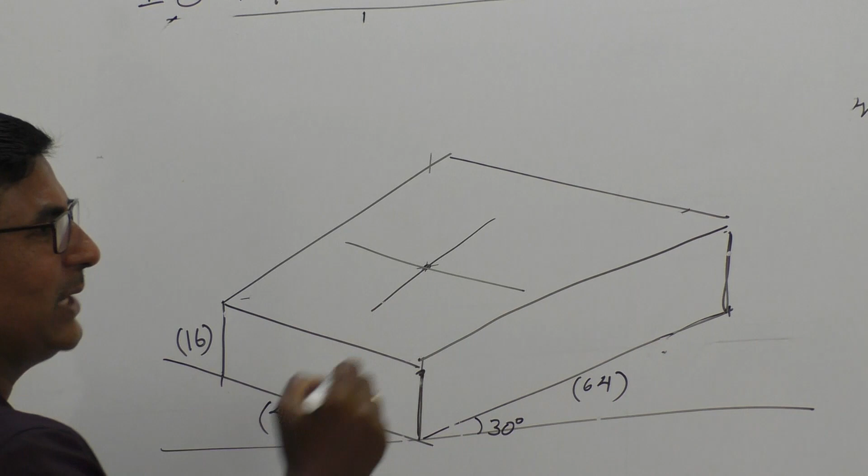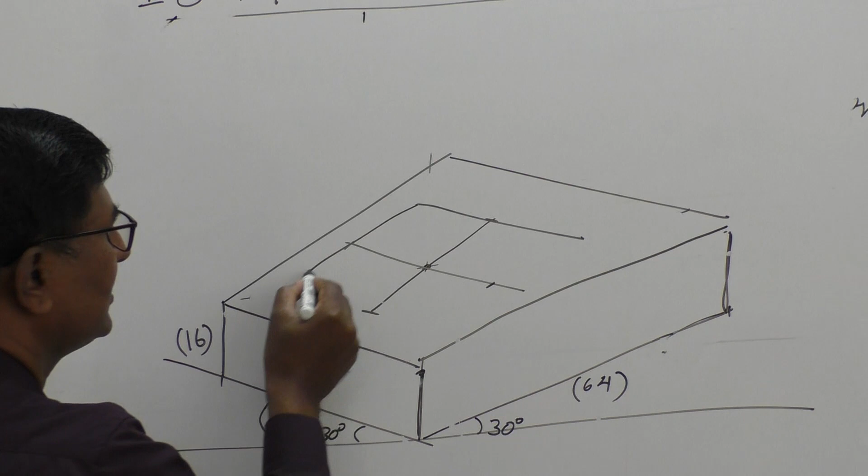Coming to this one, 40 into 40. You take two boxes this side, two boxes this side, two boxes this side, two boxes this side. Draw a line parallel to this, parallel to this, parallel to this, parallel to this. Make sure all these lines must be very thin.

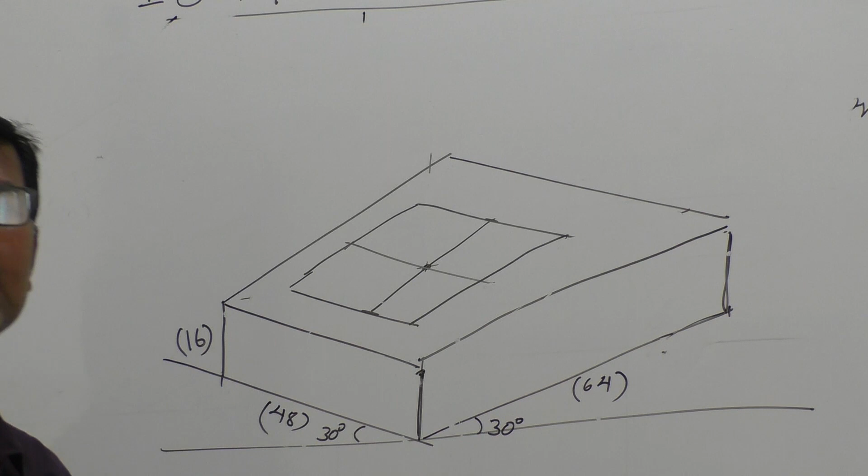Till I finish the whole problem, every line must be thin so that it avoids erasing the things. So in order to make you people look at the things properly, I have drawn a dark line, but in fact they are supposed to be very thin lines. So I finished the bottom square, that is 40 into 40.

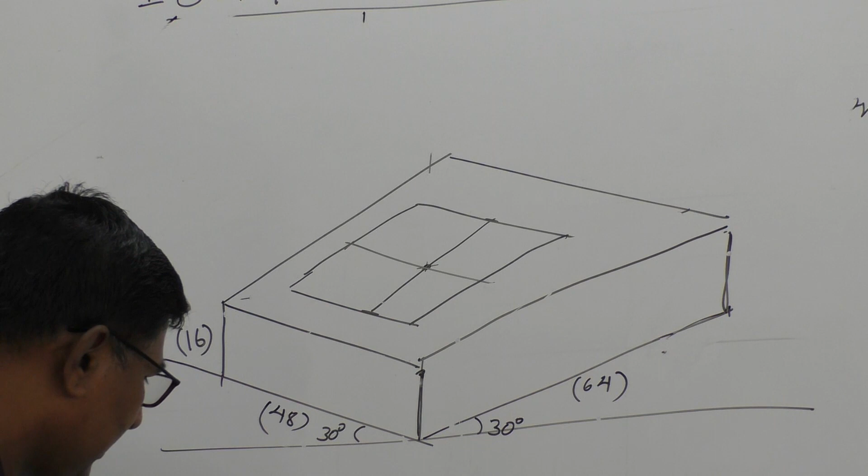Now I am supposed to take 30. So if I take this one, 0.8 into 40 means 32 millimeter. I took 32 millimeter actually. If this is the center, this is 32, 32, 32, 32.

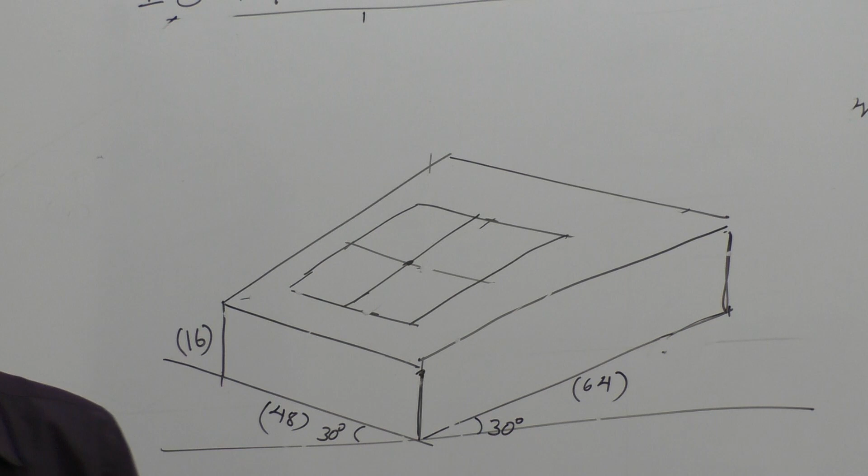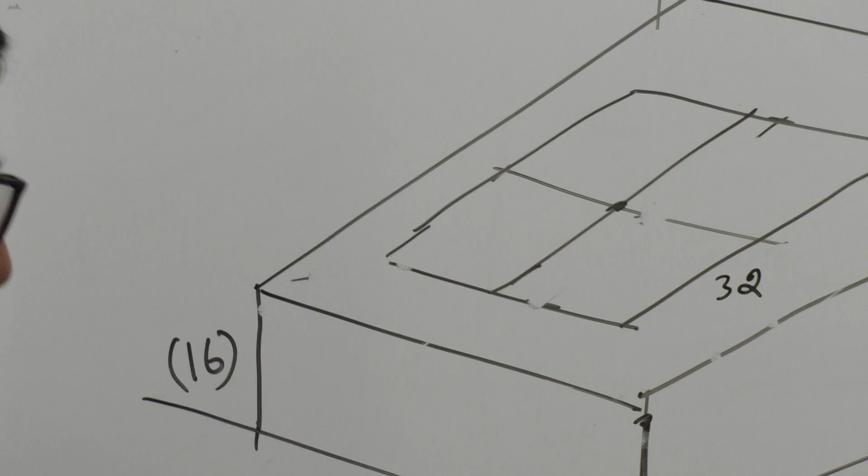What I said in this paper, already these 4 boxes, if you count, they are reduced to a size of 32 millimeter. You need not worry about that, but actually I have taken 32 millimeter here. This 32 I have taken here. 16, 48, 64. 64, 48, 16, and this is 32.

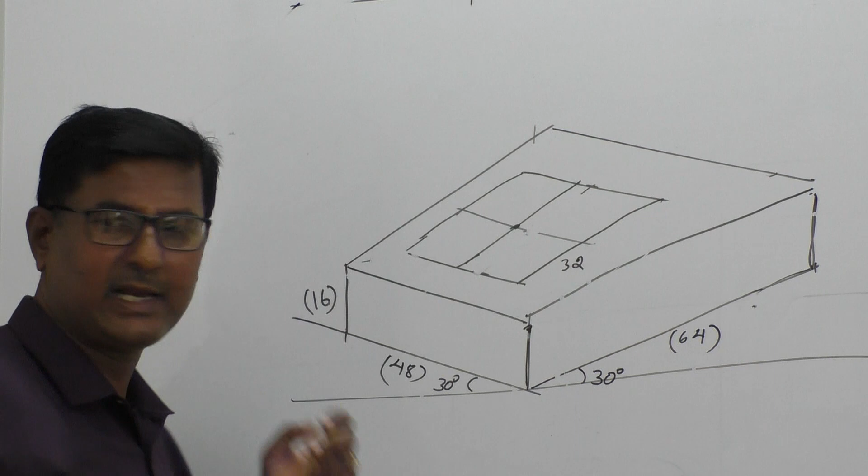Out of which 16, 16, 2 boxes means, whereas there it is already reduced to a size of 32. So what is the height now? 30. Again, 0.8 into 30 means it becomes 24.

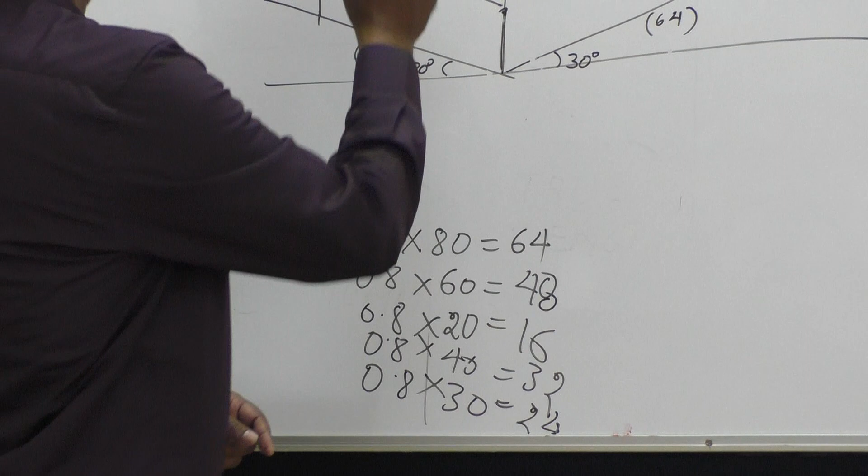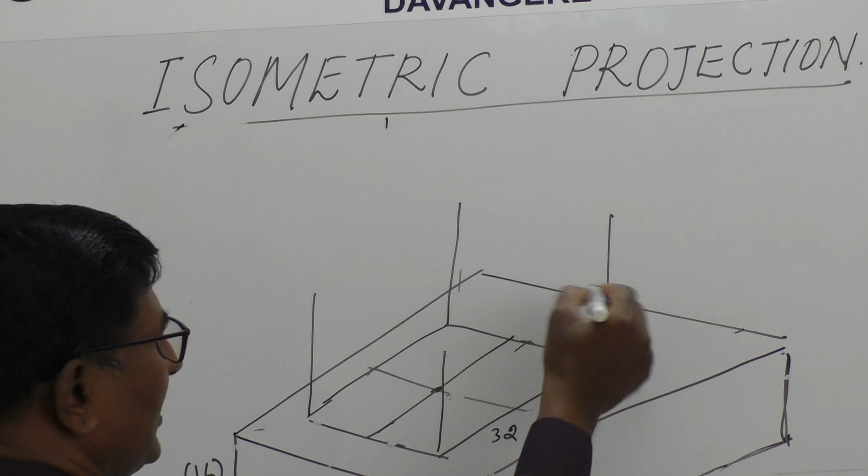Draw a pillar of 24 millimeter, draw a pillar of 24, draw a pillar of 24, draw a pillar of 24 millimeter from every corner of this small square, because this is the second object we are talking about. Whatever I have written in the bracket, you are not supposed to write. Just for the sake of explaining the things, I have written them in a bracket.

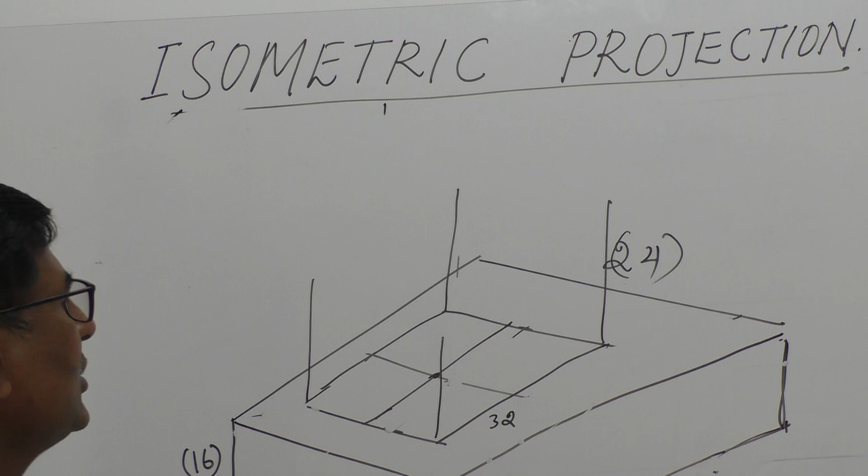Soon after you draw pillars here, if you are comfortable with my teaching, I can speak in Kannada.

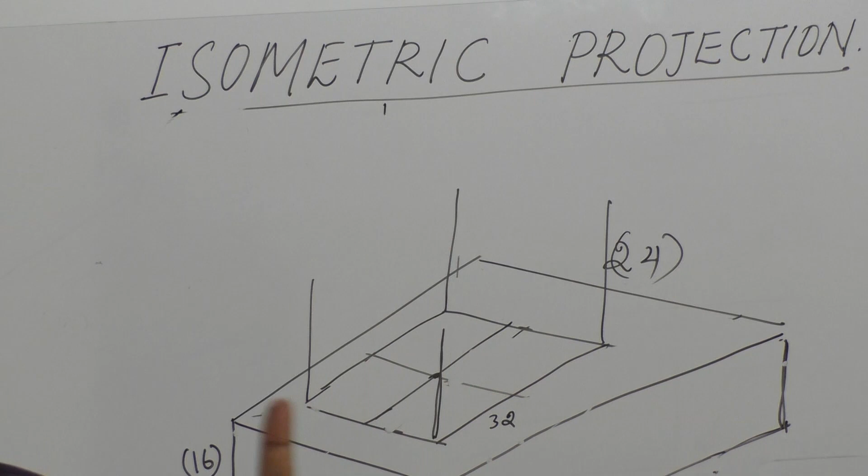It is something like a chapra or a hut that you construct. If you are taking 4 equal sized pillars, you will get a plane which is parallel to the ground.

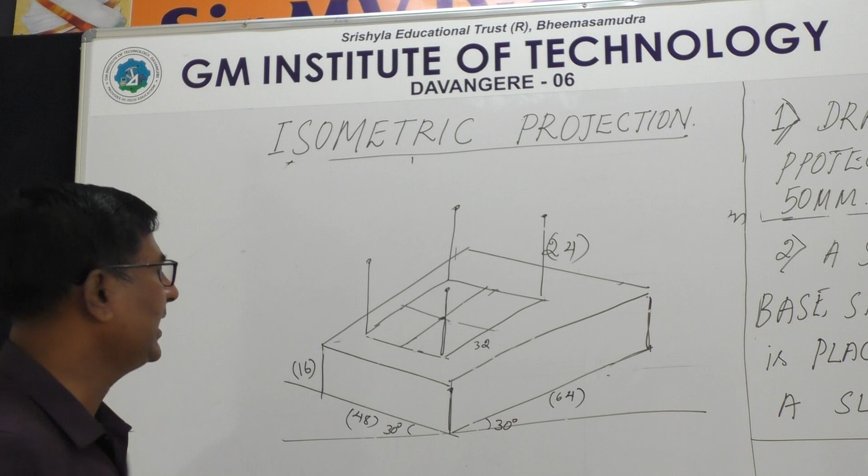Simply connect them together. You don't worry about how it appears. Connect them together, you will get it. So as I said, everything should be thin. Now you make only this portion dark.

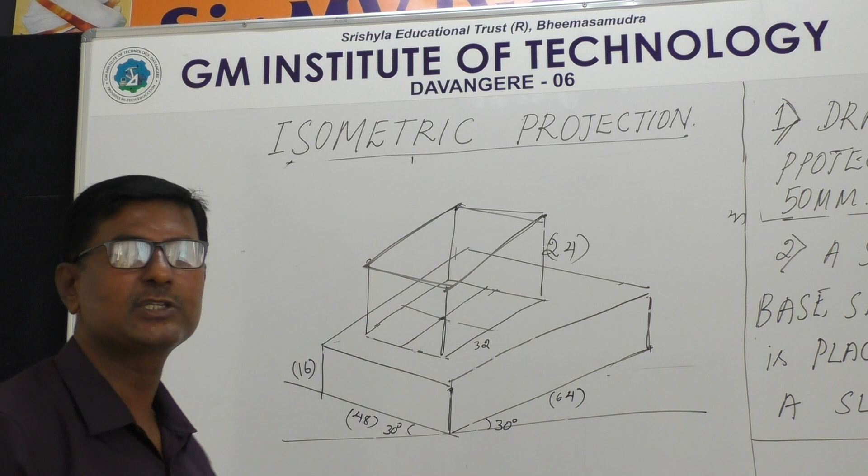Hope you are following, I am repeatedly telling. You are supposed to make it dark. Earlier, all the lines must be thin in the beginning. Later, whatever is visible, you make them dark.

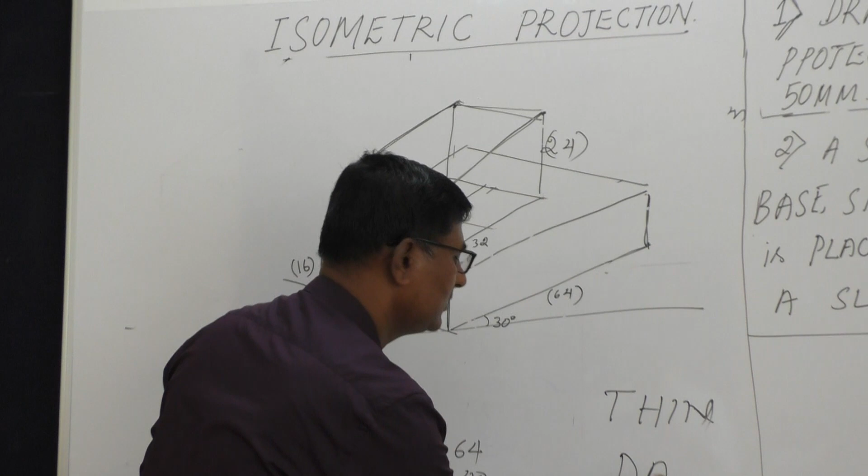Which lines are supposed to be marked? Visible lines must be made dark. What are the visible lines? See, top is visible. Since, as I told, for me there is an advantage that I can erase.

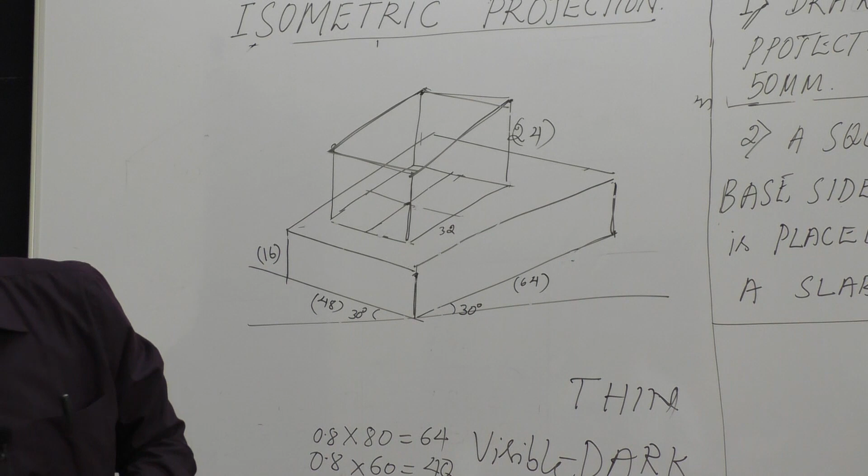I will erase this portion. I will erase this portion. You see how the things become clear. I will erase this portion.

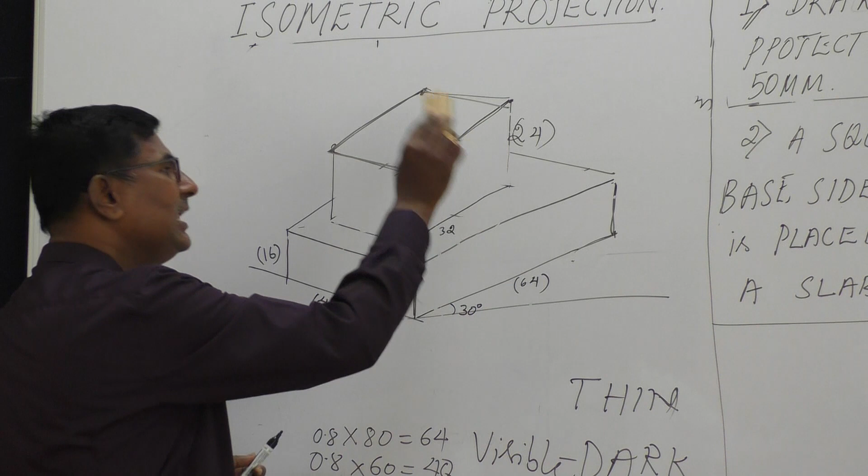Don't erase anything, leave them as it is. But leave the thin lines as it is, whereas you make these lines a little bit more darker than the earlier one.

What is the height of the pillar? It is 24. I have written 32. This is also 32. So make it dark. Make it dark. See, make only this portion of the line dark, this whole length dark, only this portion dark.

In fact, there exists a line here, but you can't see that.

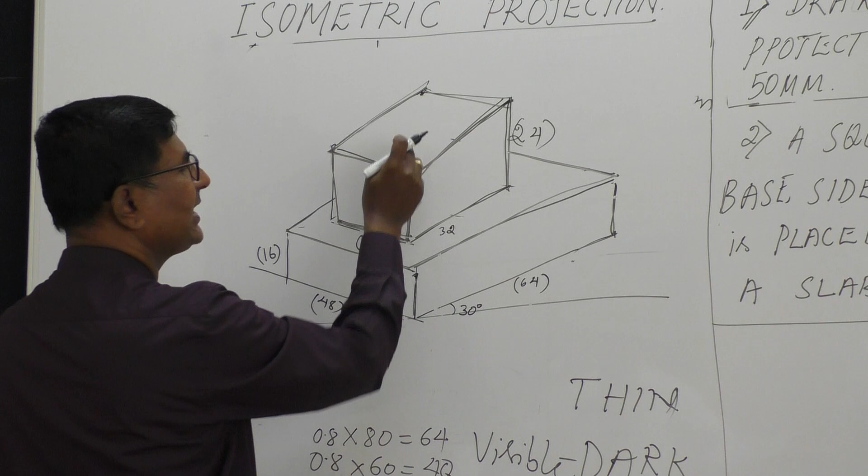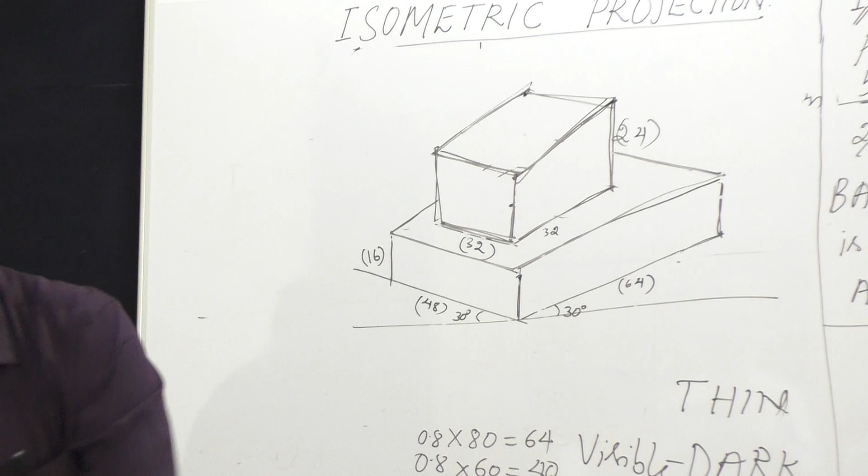This portion of the box will not be visible for you. Similarly, when I am seeing this box, the rear portion of the bottom box is not visible. So whatever is visible, make it dark. Without any hesitation, you make them dark. So this is what isometric projection.

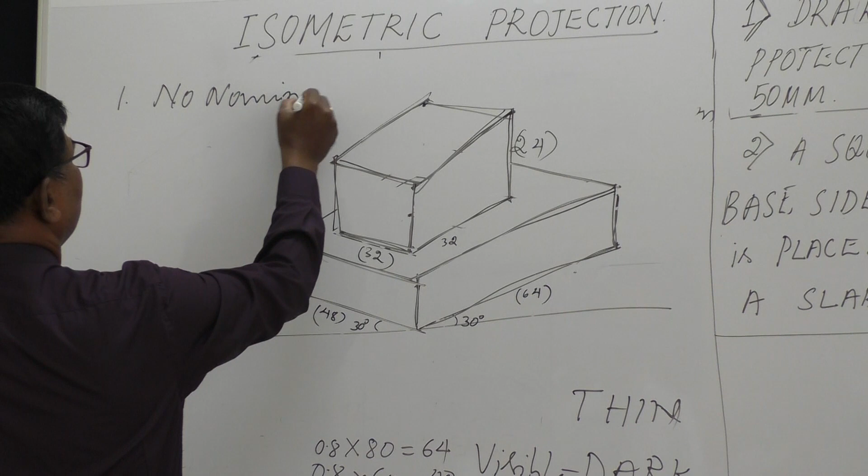Make sure: number 1, no naming is required - A, B, C, D, E, F, G, H, no naming. Number 2, no dimensioning, no dimensioning. Number 3, no hidden line.

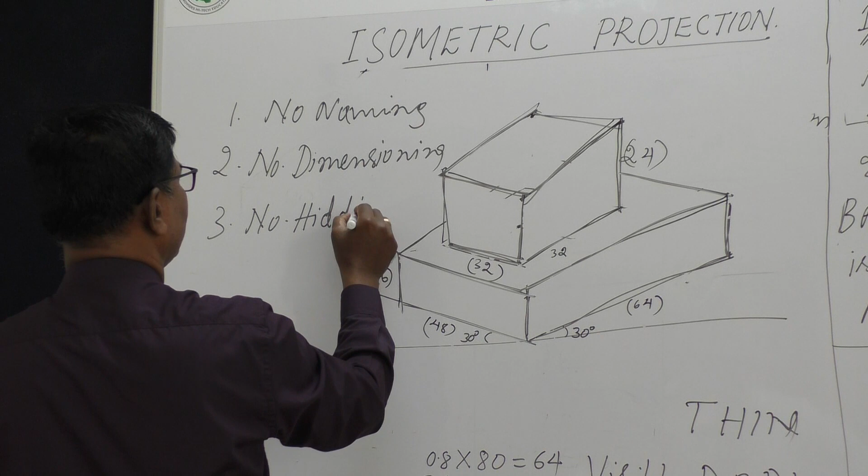No hidden lines are written - that means no dotted lines. What I mean to say is, in projection of solids, we insist you draw the dotted lines.

Whereas in isometric projection, you are not supposed to draw any dotted lines, no dimensioning, no naming like ABCD should be written.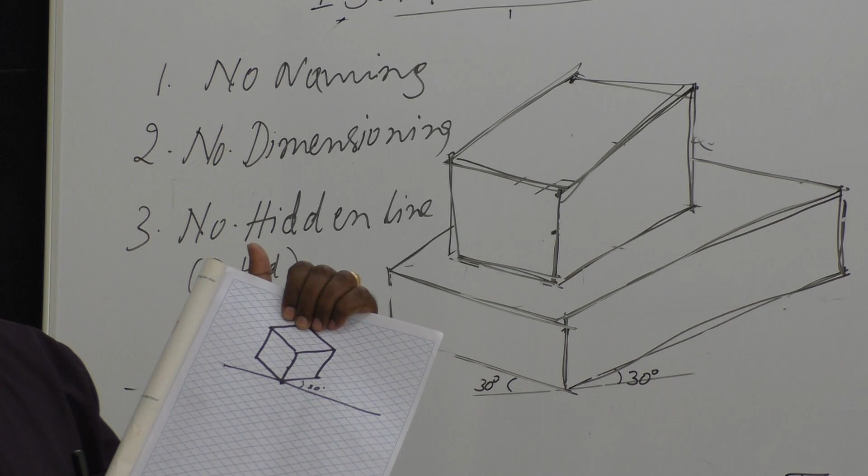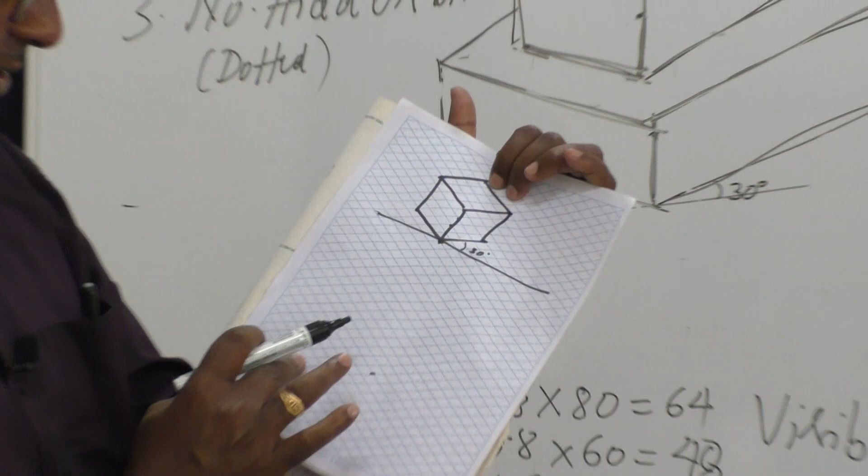Select any point you wish, select a point here. Make sure what is the size - you can take it a little bit left side or bottom, use the space comfortably. I have chosen this one.

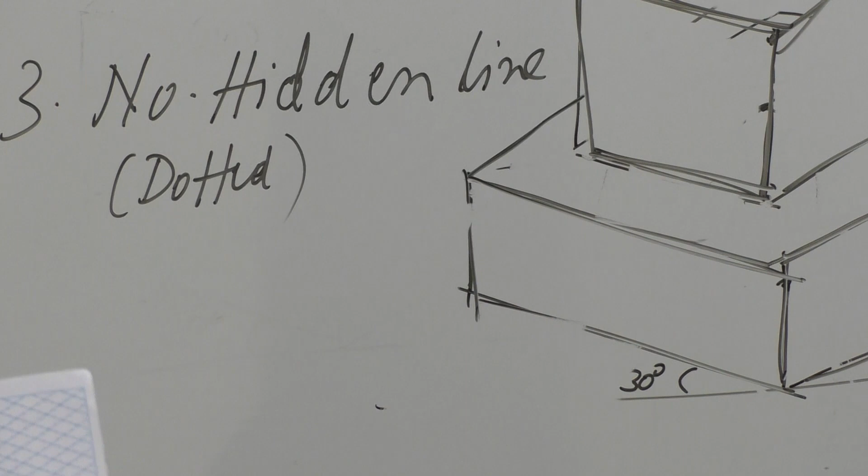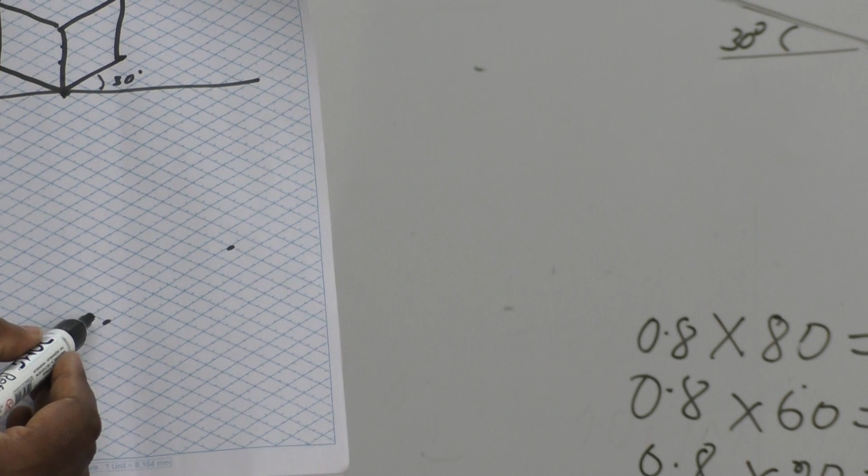I go 80 millimeter in this direction, that means 8 boxes. These 8 boxes mean 80 millimeter, but make sure these boxes are already compressed, reduced to a size of 64 millimeter. So when I take 8 boxes this side, it is to the size of 64 millimeter. Then 60 millimeter means 6 boxes - 1, 2, 3, 4, 5, 6.

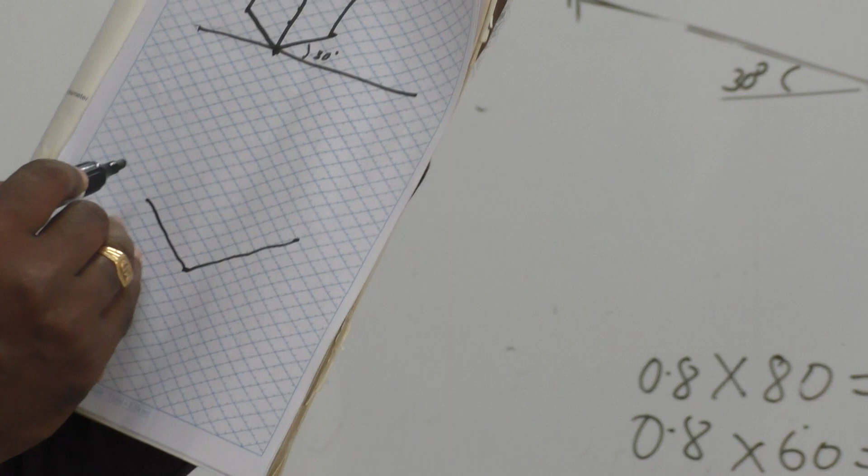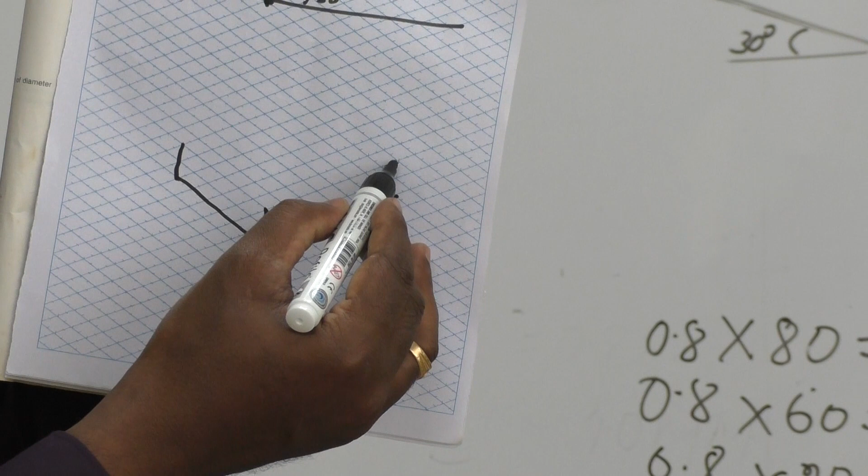I draw this bottom. Then I draw 4 pillars - of what size? 20 millimeter slab. So you take vertically 2 boxes from this corner to this corner, this corner to 1 box, 2 boxes here. So I complete this.

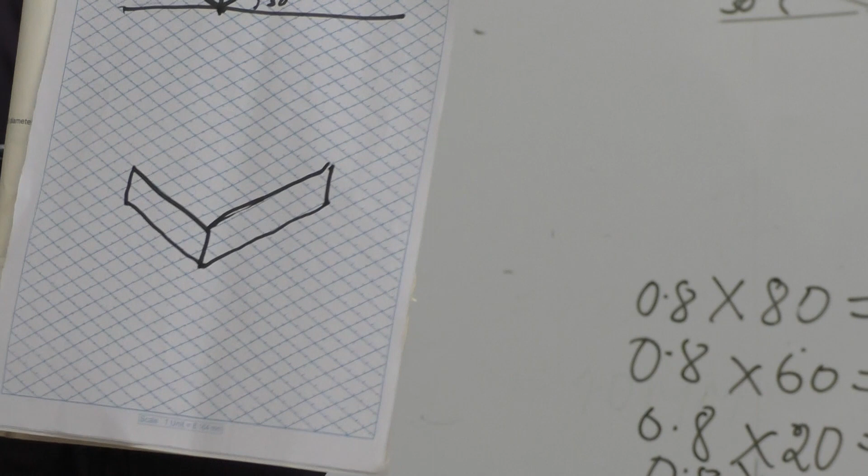At this instant I stop here because I don't have a thin pencil - see, you have pencils where you can draw the thin lines.

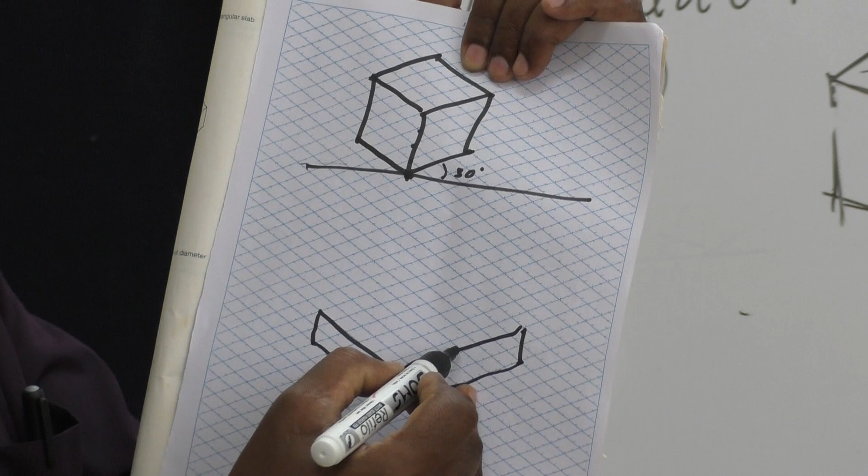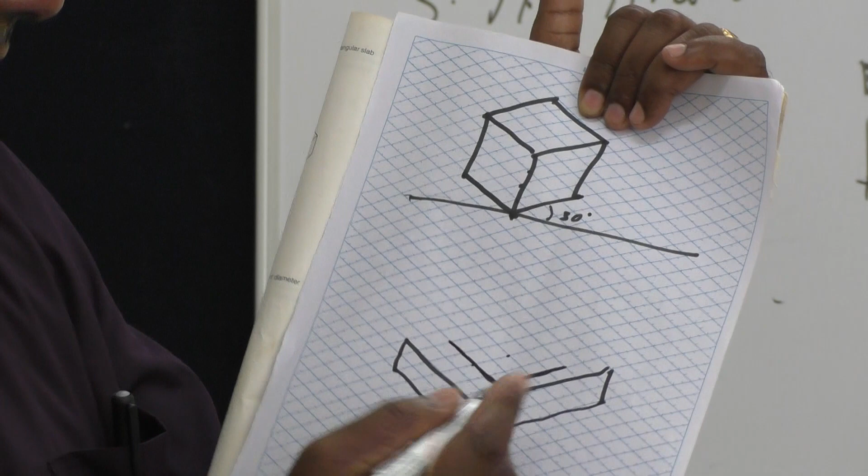Now you fix up the center. This side 6, that side 8, so 4 boxes this side - this is the center. From this center I go with a box like this, 2 boxes from this, 2 boxes this side. I stop here because I took only this portion of the line.

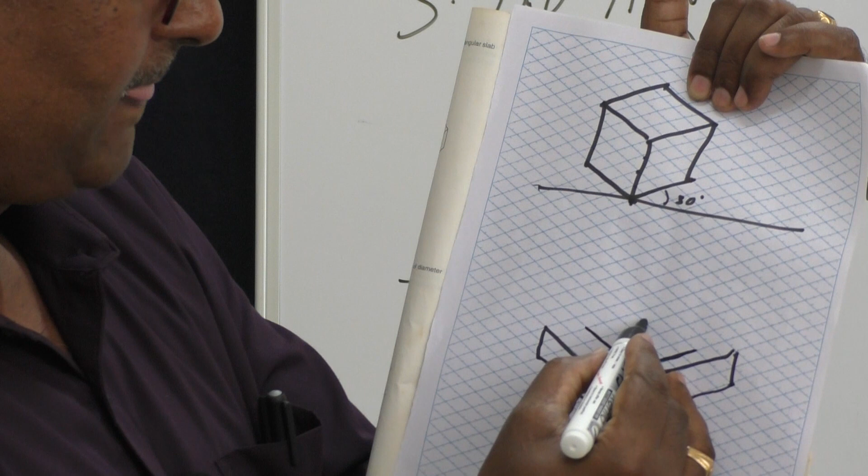Now I go with the height. What is the height? 30 millimeter, 3 boxes you count now - 1, 2, 3, 1 line. 3 boxes means vertically if you go up, this corner to this corner 1 box, this corner to this corner another box, this is another. Again you go with 1 more.

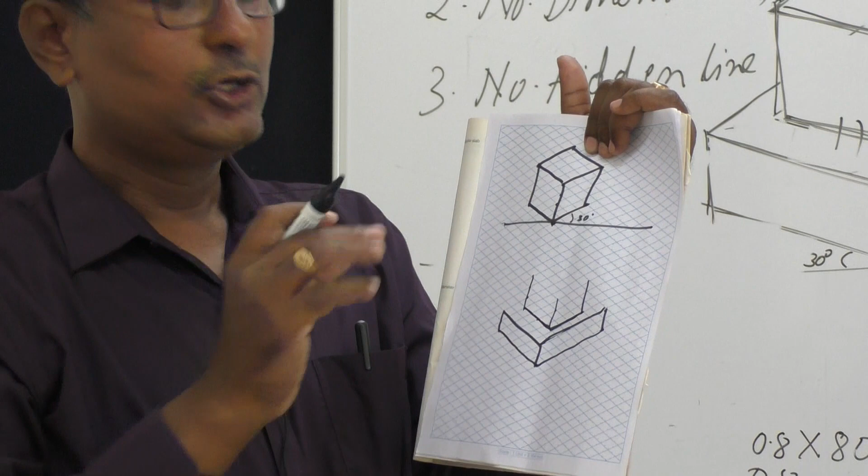Now I have finished everything. Now I start doing darkening lines, dark lines from the top. I have reached the top. Make sure don't make any line dark till you reach the top peak. So now I am here at this location - finish of this top.

Then I come to this bottom portion - only this portion is visible.

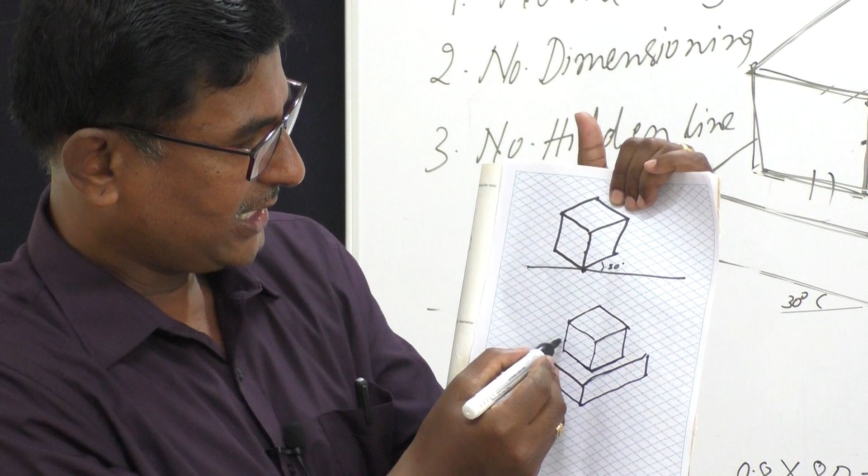This is what isometric projection is. This is the problem for 30 marks.

Hope you are following - that's all you need to do. In this problem, just you have to put question number, problem number 2 for the exam.

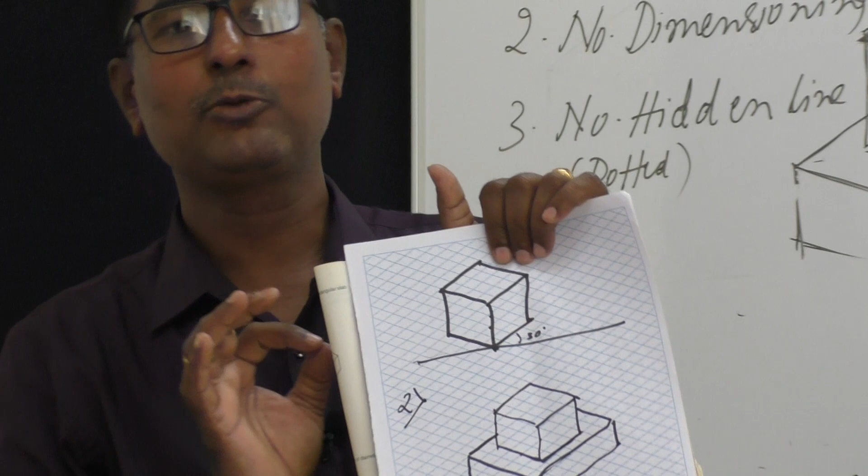Every line is compressed, as I told, to a size of isometric length - none of the lines are in true length.

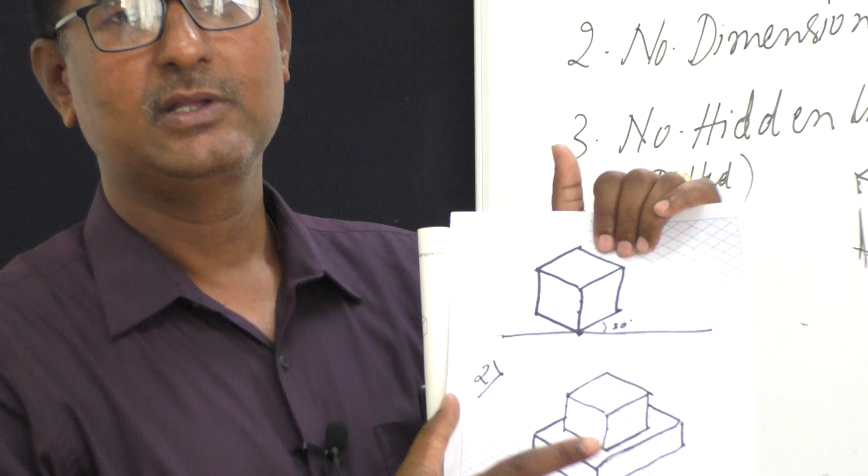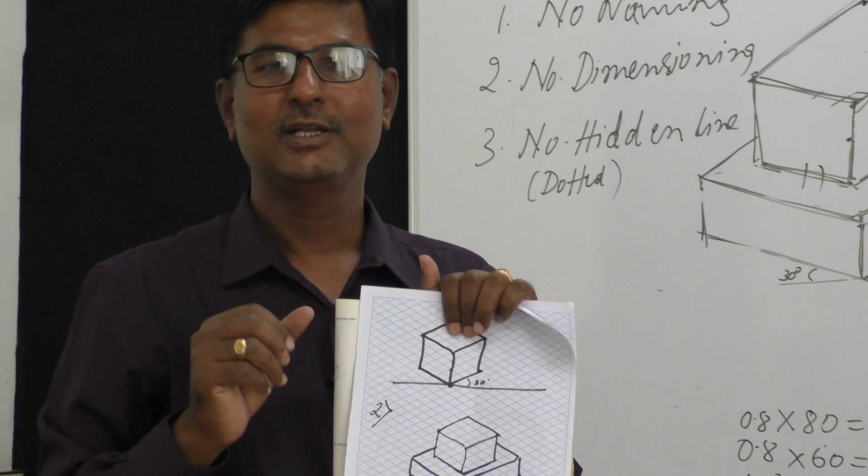These are the 2 problems I have taken just to convince you. Make sure, particularly this chapter isometric projection does not need much explanation for the reason that you turn by 30 degree, you lift by 30 degree, all the lines are in true length. Only 3 things here to remember.

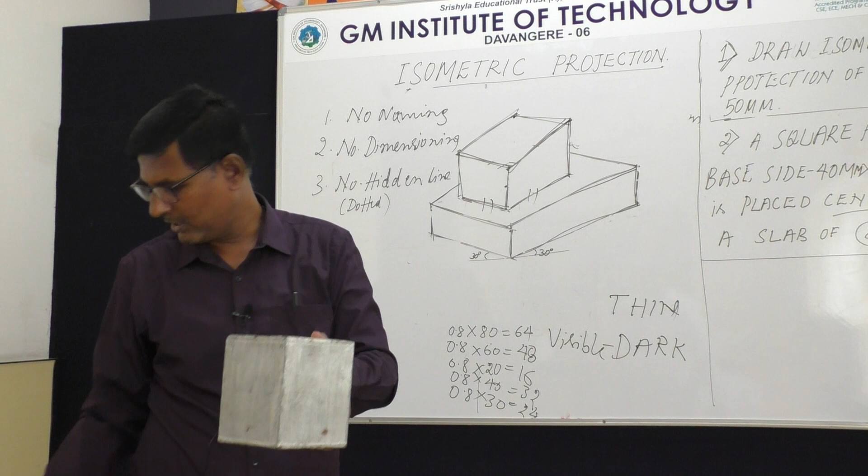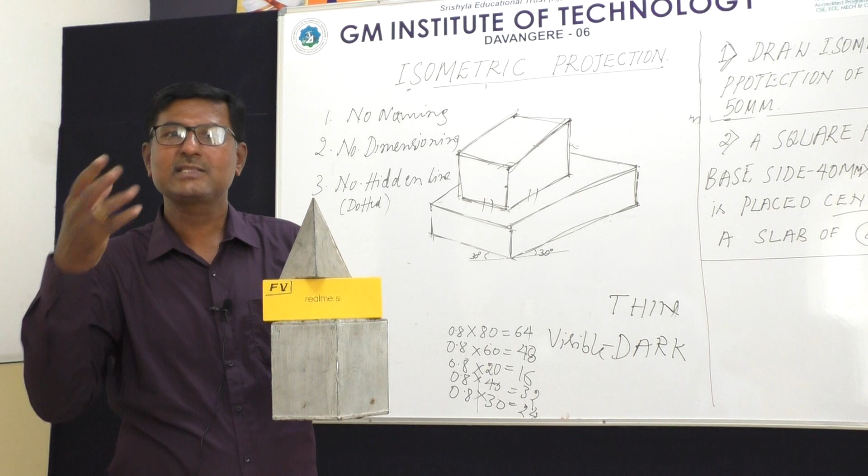The author has imagined as many problems and he has written isometric projections for them. So you go with your own imagination.

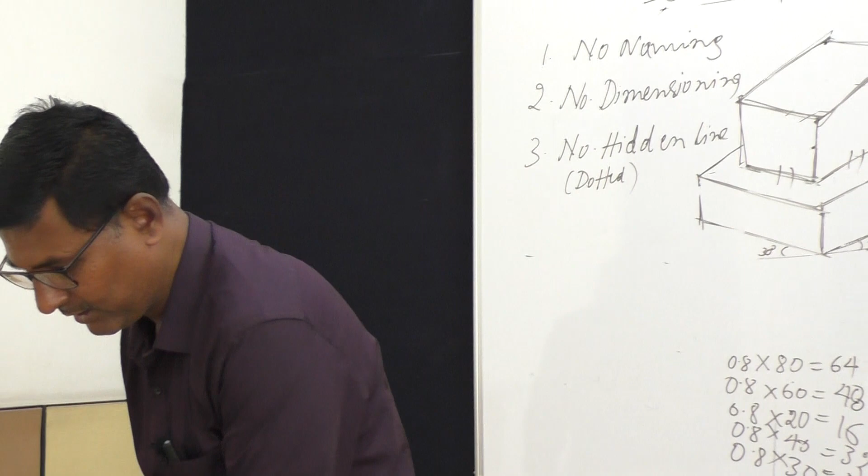Take one square prism, put a sphere over there - see, for example, I'll show you. Just now I explained, square prism over which there is a sphere, I'll show you.

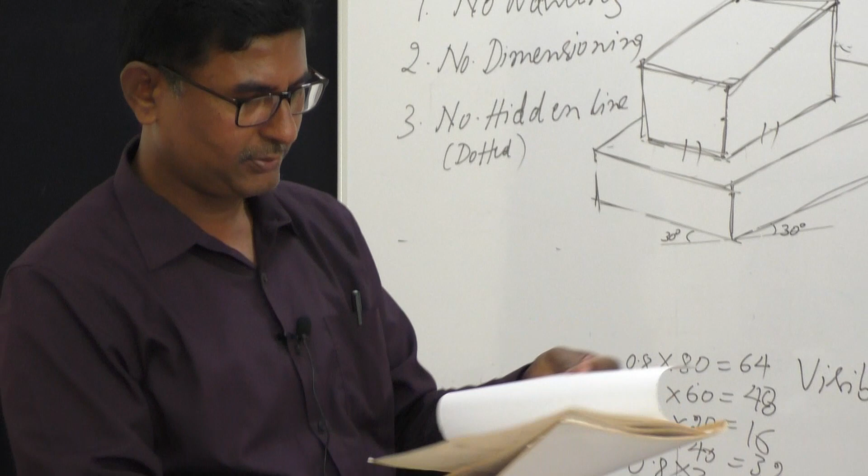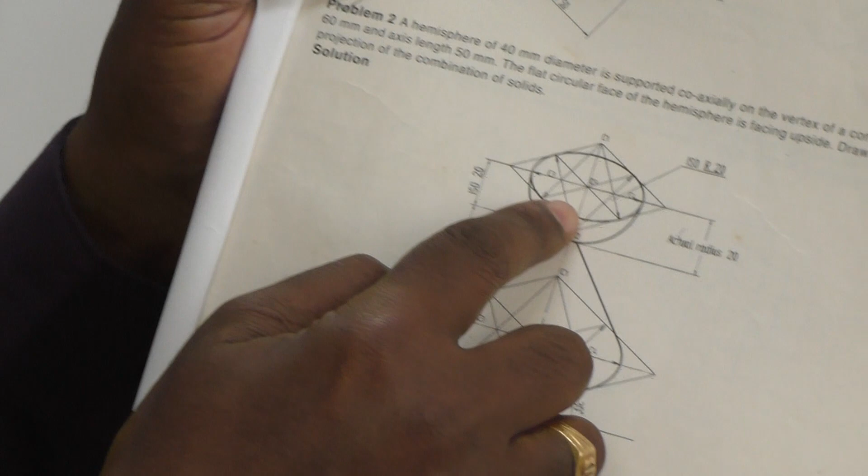That will be a problem here. That is a problem here. You see, a square cube over which a sphere has been kept. Any imagination you do - here a cone above which there is a hemisphere. If you take any problem, you see, a rectangular slab over which a square pyramid. So likewise, my colleague will explain further the other problems, but there are plenty of problems available. You know, hemisphere, sphere - that is the only object that looks different.

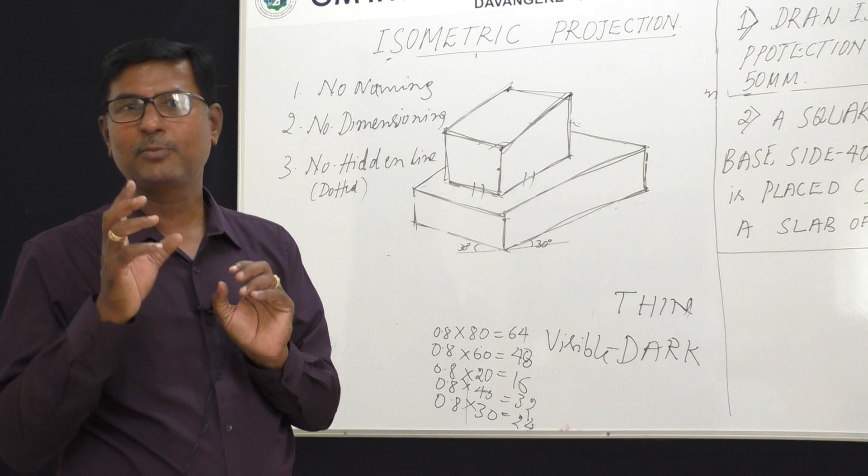See, when you turn any object with plane surfaces or a straight line, when you turn by 30 degrees, when you lift by 30 degrees, it's shortened by 0.8 times.

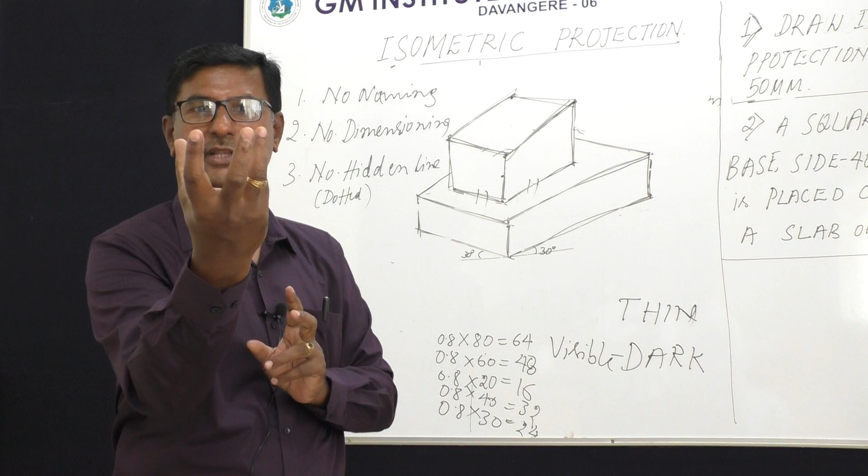When you take this kind of object, when you turn by 30 degrees, when you lift by 30 degrees, since this object is having a plane surface and straight edges, they look shorter.

Whereas when you take a ball, a sphere, just imagine a ball - when you turn the ball by 30 degrees in this direction, the ball looks like a ball without any changes.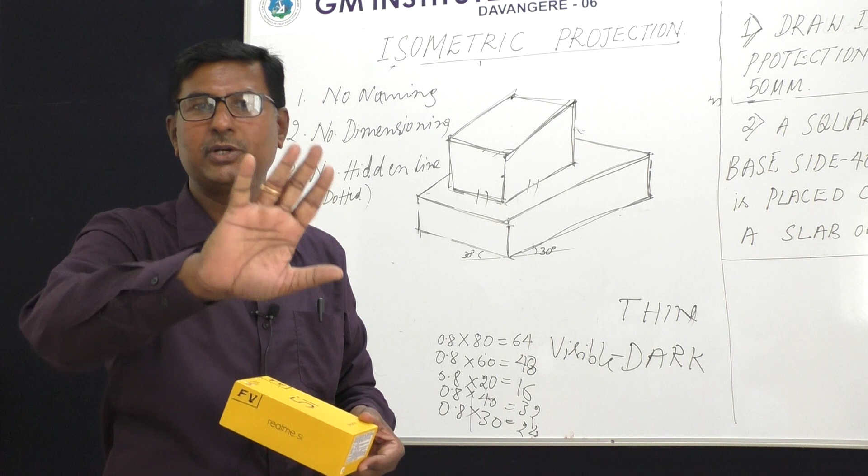So in my next class, in my next lecture, we will explain how to draw the isometric projection of a sphere, hemisphere, and cylinder. These are the only three objects with curved surfaces - they do not change in size.

Apart from that, you take any problem in isometric projection, every line is shortened. Since every line is shortened, repeatedly I am telling you, it cannot be used by a manufacturer, maker, or industry.

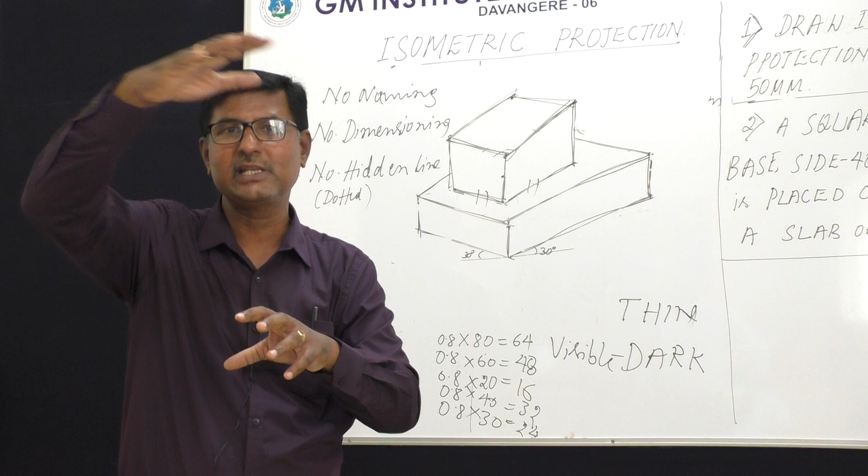See, come here, this is orthographic projection. Look at the orthographic projection of the car. This is the front view of your car. This is the top view of the car. This is the side view of the car. This means you'll run away from the showroom - you'll never buy the car.

Similarly, an architect, one who is a civil engineer, will prepare two drawings. One drawing is for the Mestri, the one who builds the house, showing front view of the house, top view of the house, side view of the house.

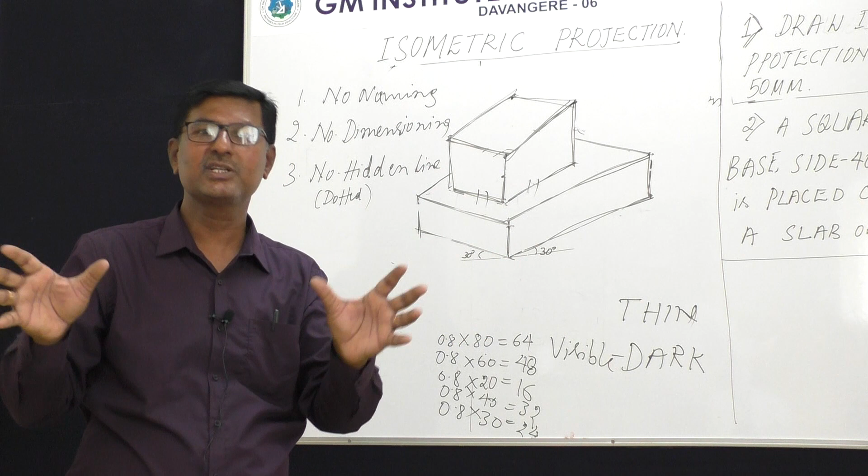Engineers also use this. Ultimately, one branch of engineering called ergonomics - ergonomics is a branch of engineering which speaks about the aesthetic look of the product. So when I write the sketch like this, the customer is convinced that my product appears like this. See, beautification is more important. That's why in engineering, this isometric projection is also having a prominent role in making the customer convinced.

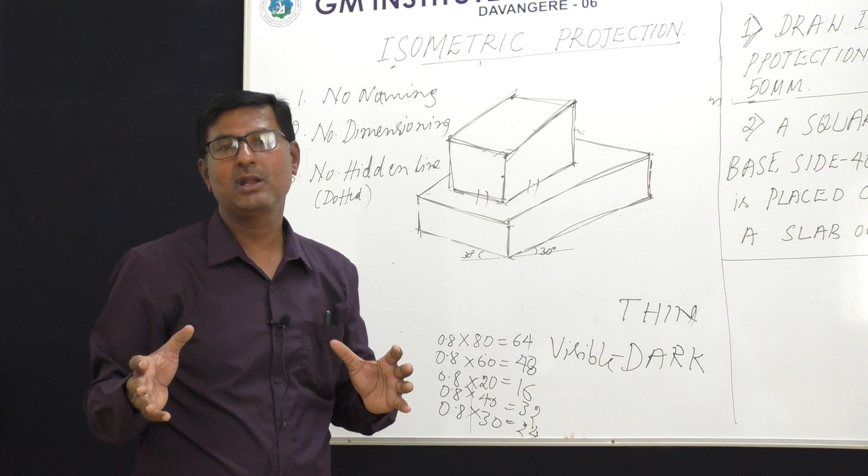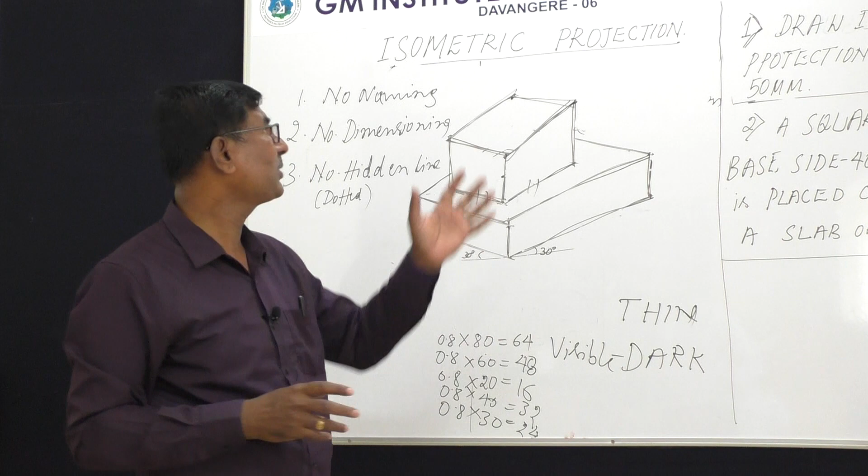So ultimately, suppose if I give a 4-wheel with one chassis, people never buy the car. What they expect is they want the beauty of the car. So that's why engineers first prepare isometric projection. After seeing how it looks, they go with orthographic projection.

Orthographic projection is to make the product, whereas this is to see the product. So with this I conclude this first class. In the next class we will go with some more problems. Thank you.